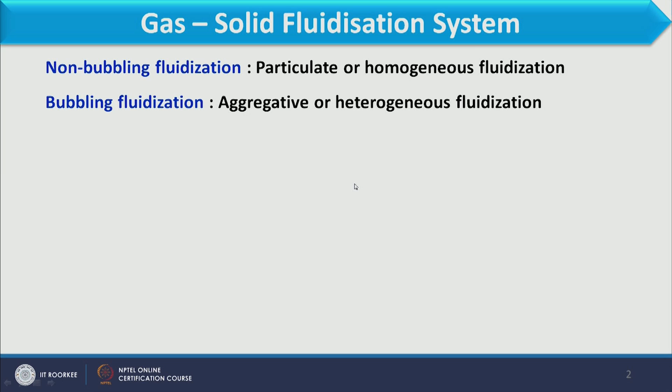Let us start with non-bubbling fluidization. Although fine particles generally form fluidized beds more readily than coarse particles, surface related forces tend to predominate with very fine particles. So though fine particles are fluidized more easily compared to coarse particles, there is some problem as far as fluidization is concerned, because of surface related forces acting on fine particles.

It is very difficult to fluidize some very fine particles, as they tend to form large stable agglomerates that are almost entirely bypassed by the gas. So when we consider very fine particles, due to surface related forces they join other particles and form a bigger particle. So when the particle becomes larger, the gas, instead of fluidizing it, bypasses these particles. That is the problem with very fine particles.

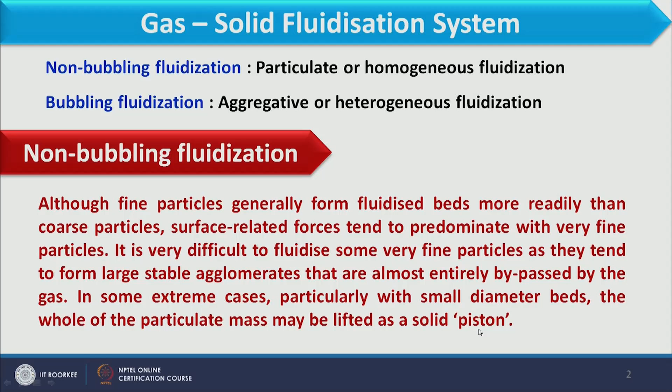In some extreme cases, particularly with small diameter beds, the whole of the particulate mass may be lifted as a solid piston. So when we consider very fine particles, sometimes this situation occurs: instead of fluidizing a single particle or a group of particles, all the fine particles join together, and when fluidized, the whole section is fluidized at once, so it is lifted as a piston.

At low gas rates, the bed may exhibit a regular expansion as the flow rate increases, with the following relation between fluidizing velocity and voidage. So for non-bubbling or particulate fluidization, regular expansion is observed at very low flow rate when dealing with gas, and as velocity increases, the relation Uc/Ui equals e raised to power n describes how voidage is related to velocity.

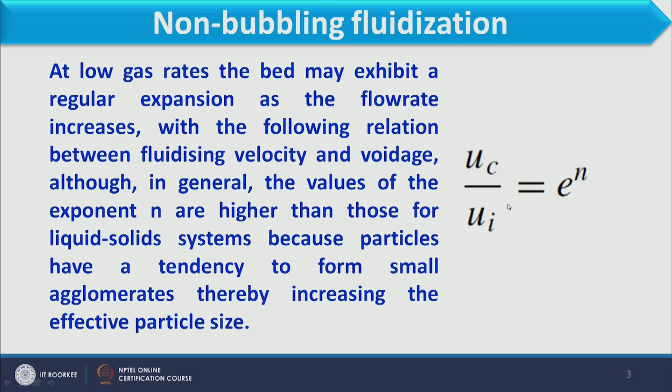In general the values of exponent n in this expression, e raised to power n, are higher than those for liquid-solid systems, because particles have a tendency to form small agglomerates, thereby increasing the effective particle size. So when dealing with gas at low flow rate, bed expansion will be uniform, and can be correlated with voidage by the expression Uc/Ui equals e raised to power n, but here the n value should be larger compared to liquid fluidization.

Now we are discussing bubbling fluidization, where the region of particulate fluidization usually comes to an abrupt end as gas velocity is increased. So in bubbling fluidization, what happens? Bubbles form inside the bed, and that happens when particulate fluidization comes to an end.

These bubbles, formed after particulate fluidization, are usually responsible for the flow of almost all of the gas in excess of that flowing at minimum fluidizing velocity. If bed expansion has occurred before bubbling commences, the excess gas will be transferred to the bubbles while the continuous phase reverts to its voidage at minimum fluidizing velocity, and in this way it contracts.

So here, when dealing with bubbling fluidization, we see how bubbles are formed in a fluidized bed. When gas velocity increases beyond the minimum fluidizing velocity, instead of further expansion of the bed, the excess gas accumulates as a bubble, and that bubble keeps increasing in size as it moves from the bottom of the bed to the higher side.

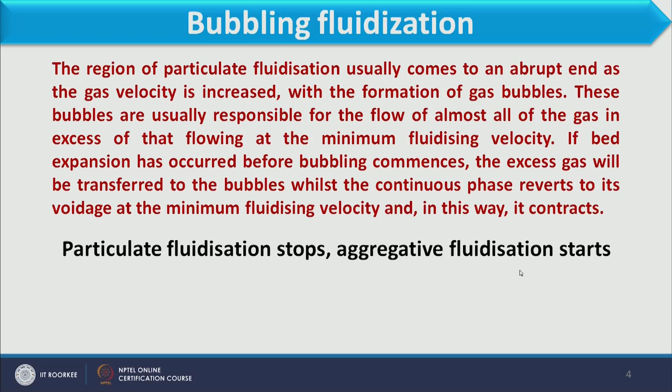So in the case of gas fluidization, what happens? At low flow rate, particulate fluidization proceeds, whereas when velocity increases, it converts into aggregative fluidization, and formation of bubbles occurs when we have excess air in the bed. So upper limit of gas velocity for particulate expansion is termed as minimum bubbling velocity.

We understand that once particulate fluidization occurs, aggregative fluidization will follow, and bubble formation occurs in aggregative fluidization. Therefore, the minimum velocity of gas where bubble will be formed is the highest velocity where particulate fluidization occurs.

In this slide we will classify different powders. Why are we classifying? Because each powder has different tendency and different particle size. So how these powders behave in a fluidization environment, that we have to observe. The ease with which a powder can be fluidized by a gas is highly dependent on the property of particles. In general, fine low density particles fluidize more evenly than large dense ones, provided they are not so small that they make agglomerates.

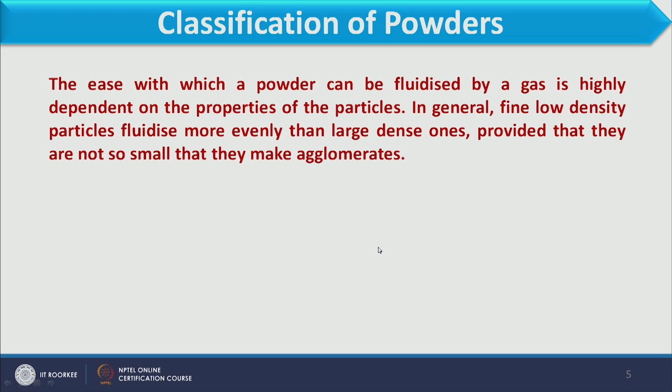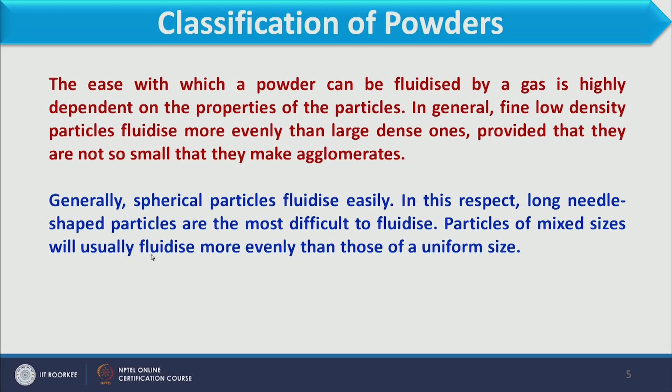Here we have different powders, and each has a different category because it has different properties and behaves differently during fluidization. For example, spherical particles fluidize easily. In this respect, long needle shaped particles are most difficult to fluidize. So particles of mixed sizes will usually fluidize more evenly than those of uniform sizes.

We should also understand that it depends on the shape of the particle. When we consider spherical particles, they fluidize easily, whereas needle type or strip type particles will not fluidize easily. When considering a mixture of particles where different shapes are available, those particles will be fluidized more evenly in comparison to uniform particles.

Now we will discuss the classification of powders. Geldart classified powders into 4 groups according to their fluidization property at ambient condition. Geldart classification of powders is now used widely in all fields of powder technology. So here we have 4 groups.

Group A powder, when fluidized by air at ambient condition, gives a region of non-bubbling fluidization beginning at UMF. Now what is UMF? It is the minimum fluidizing velocity. So the powder falling in group A shows particulate fluidization when minimum fluidization condition is achieved, and further bubbling fluidization occurs when velocity increases.

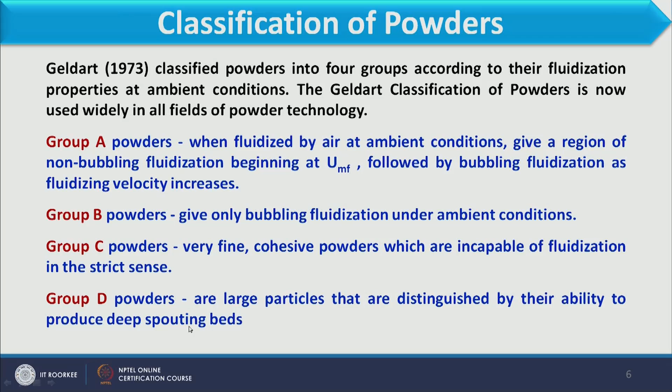Now we have group D powder. These are large particles that are distinguished by their ability to produce deep spouting beds. So group D powder has a tendency to form a spouting bed. What is a spouting bed? We will discuss that in subsequent slides.

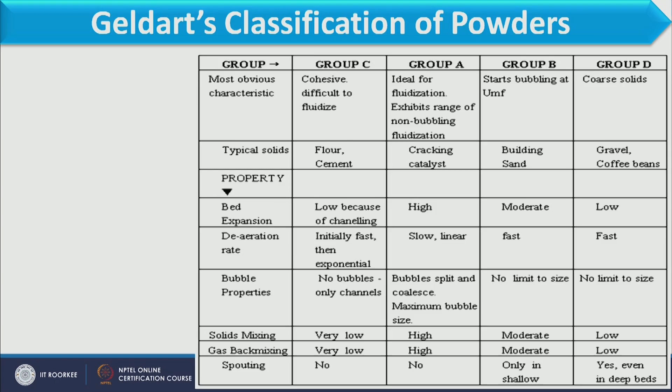Now, how can we calculate the minimum bubbling velocity for different conditions? The superficial gas velocity at which bubbles first appear is known as minimum bubbling velocity.

Abrahamsen and Geldart correlated the maximum value of UMB with gas and particle properties using the following correlation.

UMB, the minimum bubbling velocity, is equal to 2.07 exponential 0.716f, into xp, rho g to power 0.06, by mu to power 0.347. In this expression, xp is the mean sieve size of the powder.

We have to first carry out the particle size analysis to know what is the mean size available in the powder, and in this expression F is the mass fraction of powder less than 45 micrometer.

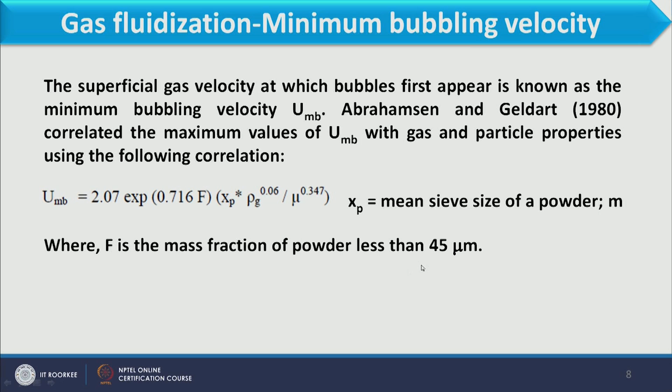So what is F? Here we have different sizes of particles in the powder, and the fraction of particles which are lesser than 45 micrometer, that we have to consider as F.

Considering this expression, we can calculate the minimum bubbling velocity.

Now what happens in group A? Group A powders where UMB is greater than UMF.

Group A powder - what is this powder? This is ideal for fluidization, and in this case minimum bubbling velocity should be greater than minimum fluidizing velocity, and at this condition bubbles are constantly splitting and coalescing.

This makes smooth fluidization. So if you see this figure, here we have splitting of bubbles and these bubbles are joining, so coalescence will occur over here.

So splitting and coalescence occur simultaneously in this bed. Through splitting and coalescence, bubbles achieve a maximum stable size, effectively independent of gas velocity or vessel size.

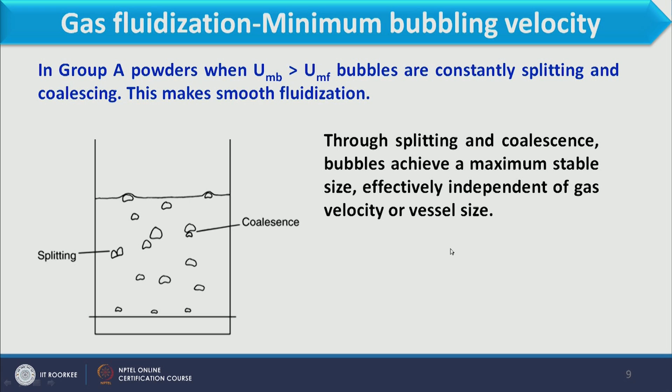So when bubbles are formed, these are continuously broken as well as join other bubbles to make a larger bubble. This happens in group A.

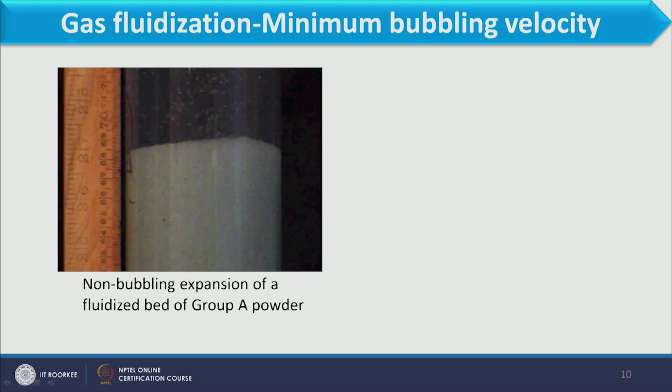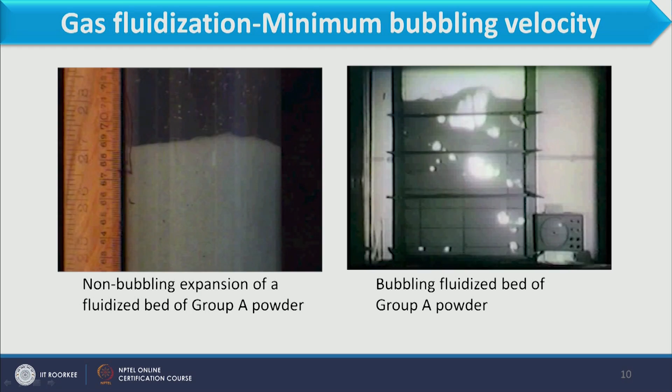So in this way the bubble bypasses the solid and fluidization does not occur properly.

And when we consider group B, as we know, only bubbling fluidization occurs in group B. So when minimum bubbling velocity is equal to minimum fluidization velocity, bubbles continue to grow in size, never achieving a maximum size.

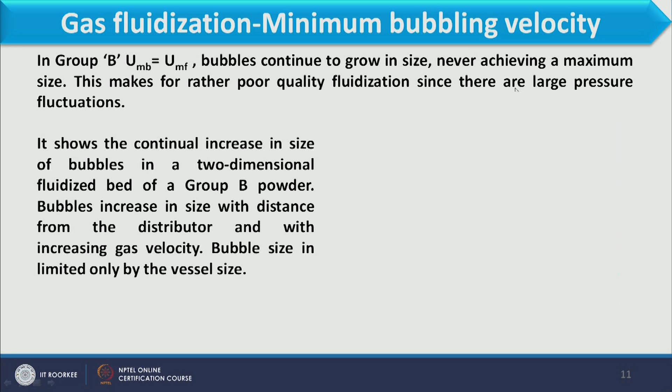This makes for rather poor quality fluidization since there are large pressure fluctuations.

This video shows the continual increase in size of bubbles in a two-dimensional fluidized bed of group B powder. Bubbles increase in size with distance from the distributor and with increasing gas velocity.

Bubble size is limited only by the vessel size. So bubble size depends on the diameter of the column. It cannot be larger, so it is only dependent on the column diameter.

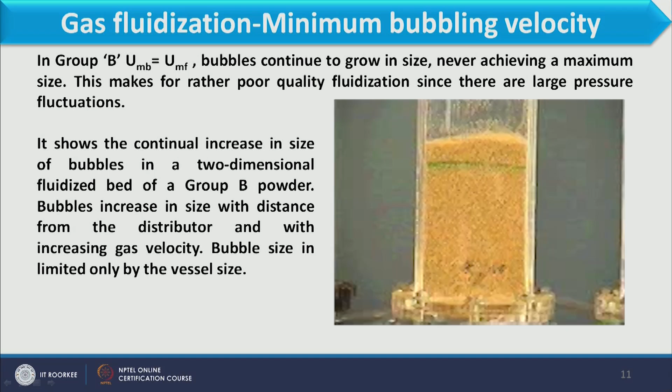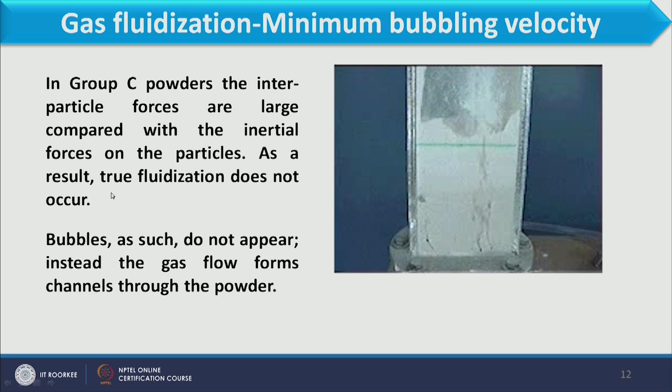So gas will carry not a single particle, not a number of particles, but the bulk of particles. We can say it lets the powder move in the form of a piston, and then it breaks down, and after some time channeling occurs inside. In group C powder, the interparticle forces are large compared to inertial forces on the particle, and as a result true fluidization does not occur. These particles are connected to each other very tightly, so it is very difficult to fluidize. Bubbles as such do not appear, instead the gas flow forms channels through the powder.

Now there is another problem with gas fluidization, that is the problem of slugging. What is slugging? When the size of the bubble is greater than about one third of the diameter of the equipment, their rise velocity is controlled by the equipment and they become slugs of gas.

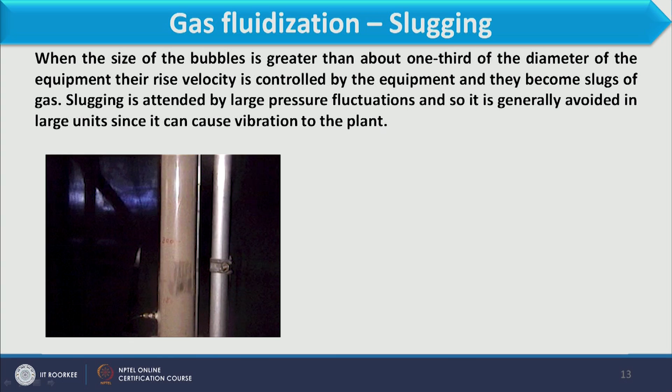If you see this video, granules are there, and due to formation of bubbles, instead of movement of particles, the bulk of particles move together. The size of the bubble becomes equal to the diameter of the column, and after some time it falls back. This is slugging. Slugging is attended by large pressure fluctuations, so it is generally avoided in large units, since it can cause vibration to the plant, and you can observe slugging in this video.

Now here we have a spouted bed, as we discussed that powder falling in group D behaves as a spouted bed. What is a spouted bed? The spouted bed represents the ultimate in channeling in a fluidized bed. Gas enters at the conical base, with much of it flowing rapidly upwards through a center core, and the remainder percolating through the surrounding solid, which may not be in a fluidized state.

So what happens in a spouted bed? When gas enters, it forms a channel in between, and the particles falling in this channel rise and then fall to the other side. However, particles not falling in the path of gas remain as they are. So in this way, a spout forms in the fluidized bed. The solids form a wall for a central spout of gas, gradually become entrained, and then disengage from the gas stream in a space above the bed, where gas velocity falls as the flow area increases from the spout area to the vessel cross sectional area.

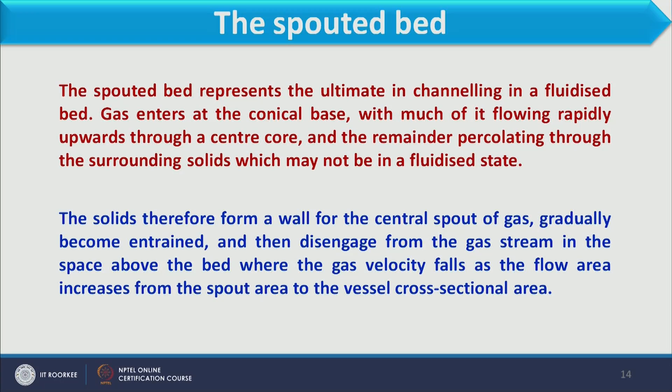Now considering spouting gas velocity, gas passes through a channel in between. When the channel is of smaller diameter, velocity will increase. However, when it reaches the upper level of the bed, it comes across a larger diameter of the column, and velocity decreases suddenly, so it carries the particles which then fall suddenly to the bed.

So you can observe a spouting bed in this video, where gas passes from the bottom and forms the channel. The particles not falling in the path of gas maintain a uniform height of the bed, while particles available in the channel rise and then fall, because when gas reaches this point it comes across a larger cross sectional area, and therefore its velocity decreases suddenly and the particles fall.

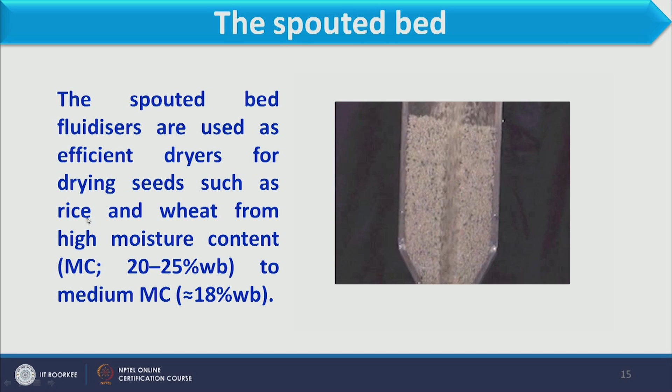So the spouted bed fluidizers are used as efficient dryers for drying seeds such as rice and wheat, from high moisture content, that is 20 to 25 percent wet basis, to medium moisture content, that is 18%.

So in this lecture 4, we have discussed different types of powders and different conditions which are occurring in these powders, and here we are stopping this lecture. We will continue gas fluidization in the next lecture. So that is all for now, thank you.